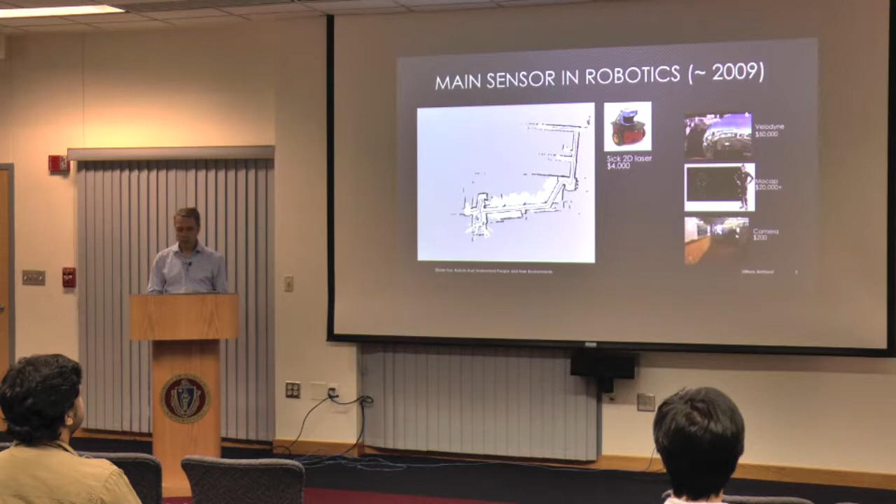So at that point in time is when the Microsoft Kinect system came out, what we call these RGBD depth cameras. The main purpose of this sensor in the Kinect system was actually to track people in gaming environments.

Here I'll show you briefly what the raw input data looks like from such a depth camera. At the time I was lucky enough to be directing an Intel research lab in Seattle, and as an Intel person, we were able to get our hands on early prototypes of that camera. So we were really excited when we were able to see this kind of data.

Especially for robotics, this was really exciting because for a robot, what you care about is how far things are away. On one hand, if you want to avoid crashing into something, it's good to know where the obstacles are. Or if you want to pick something up, it's very useful to know where that is in 3D space. That is why these cameras have had, since then, a tremendous impact on robotics.

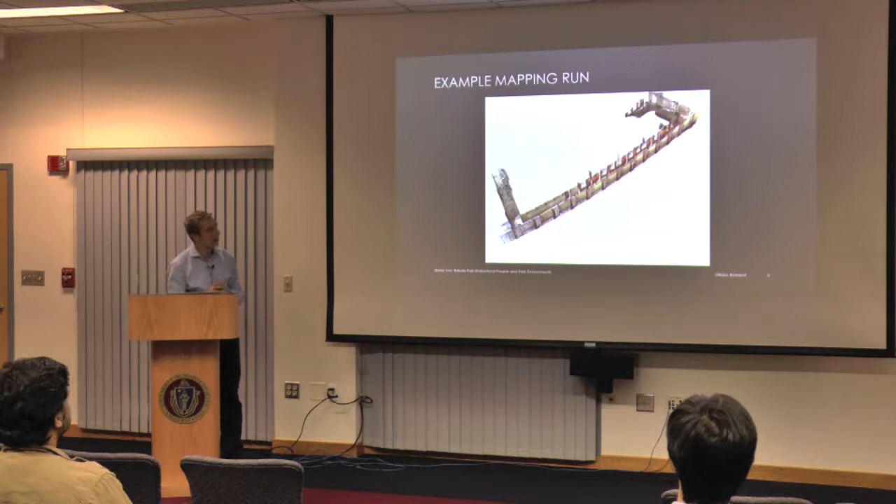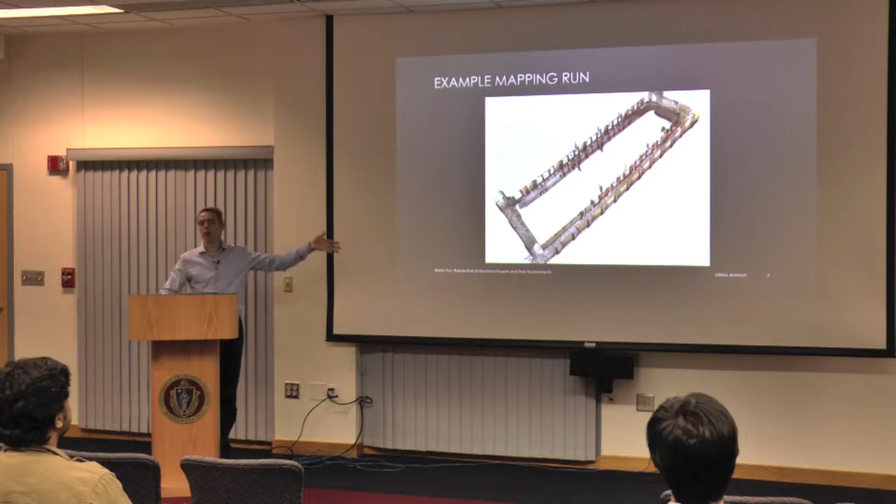This is now the step where we're doing visual odometry forwards, which means we're stitching all that data together. At some point you can detect a loop closure because it's visually the same, and then we can use this to snap things into place. Very similar to the 2D laser scanning I showed you, but now done in 3D.

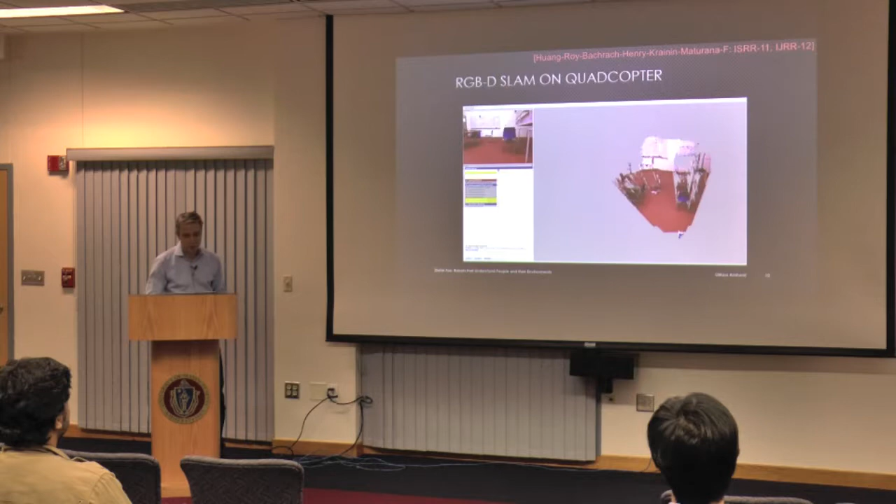Another project we did was working with Nick Roy at MIT, who does work with quadcopters. So we put it on a quadcopter, and now you can build full 3D maps on a quadcopter.

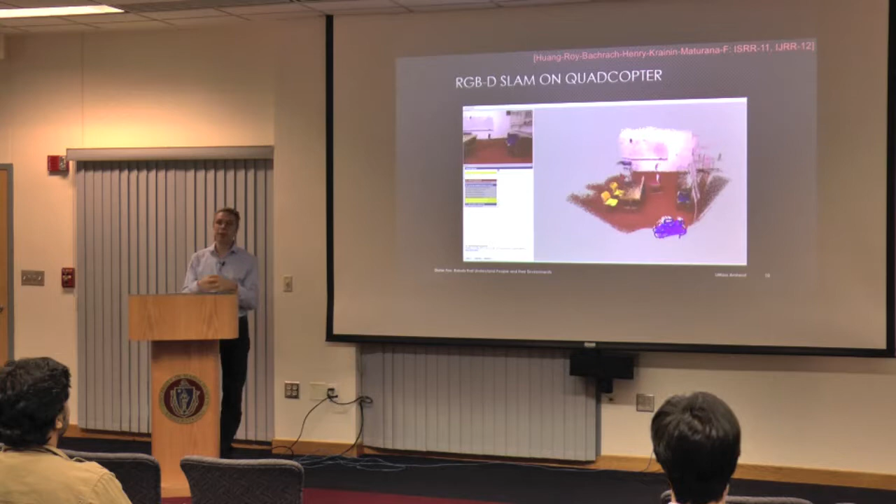There are nowadays many different techniques for building these kinds of 3D maps with depth cameras, so I'm not going to go into real depth here, just give you some examples of what we can do.

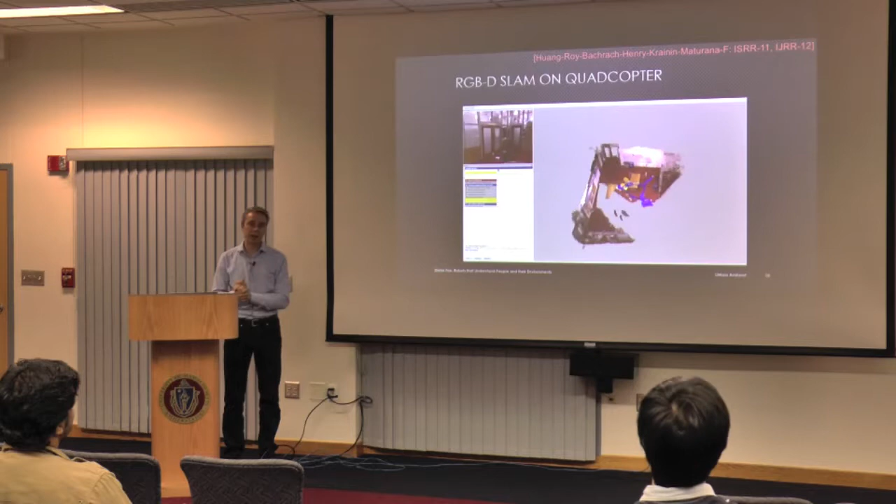The representation of the map is typically a 3D colored point cloud, where depth maps give you points in 3D space, and we use the color from the color camera at the same time. We also represent surface elements using so-called surfels, little disks in space that represent surfaces. Richard Newcombe, during an internship at Microsoft Research in Cambridge, developed a technique called KinectFusion.

I'm sure many students have seen and heard of KinectFusion, and it was really an eye-opener because they showed how you can build, in real time, very high accuracy maps of at least local areas. I'll show you a brief video soon.

The main idea is that you have a 3D volumetric representation of the space, and in each of these voxel grids—say a voxel is 1 by 1 by 1 centimeters, pretty fine-grained—you do not store whether it's occupied or not, which would be the natural thing people had done before, but you actually store something called a signed distance function.

What you store in the signed distance function is: if I'm getting a certain depth estimate along a pixel ray in the camera, then along that ray I'm storing how far in front of or behind my measurement each point is.

At the measurement I store a 0 distance, in front of it I store -1, -2, -3, -4, and behind it I store increasing positive values. I'm doing what's called a truncated signed distance function, meaning I only do this close to the surface.

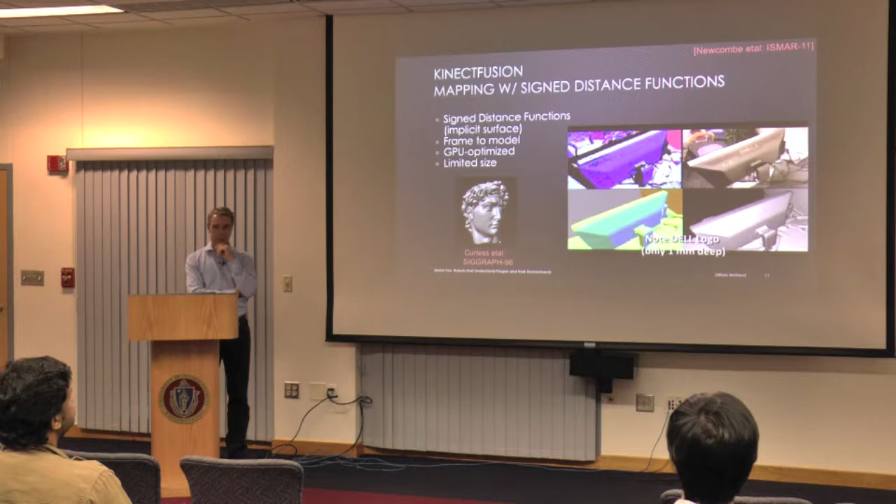The 3D voxel representation itself just stores the signed distance values, but it turns out you can very efficiently extract a mesh, a vertex mesh, from that, and render from it—you can see here on the right the 3D representation.

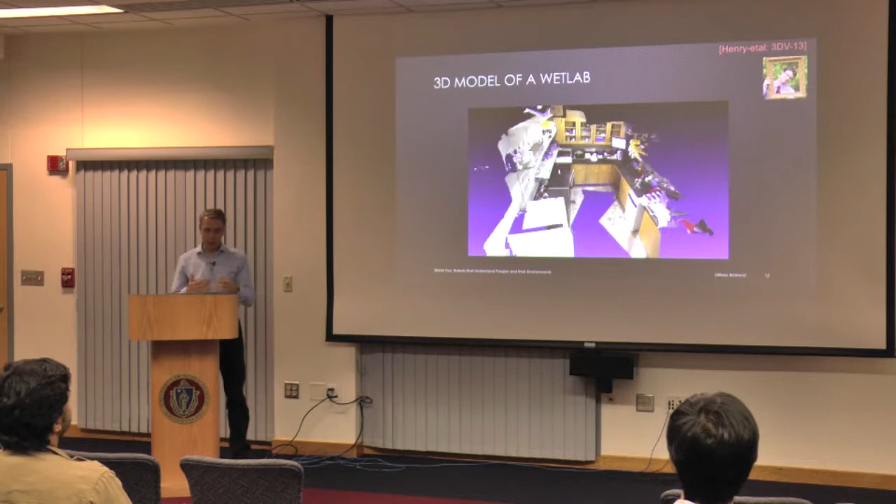Here's another map where my student Peter Henry added to KinectFusion some notions of using color for the matching, so it's jointly matching using color information and depth information, along with an ability to do loop closure in these kinds of models.

You can see that nowadays we can get pretty good 3D models of these environments, but you can also see clear limitations. For example, in the upper left there's a lot that's not modeled very well, because those are plastic bottles, and the plastic surface is not detected very well by the camera.

So there are still many limitations. Another limitation is, for example, if you want to model small objects like a keychain, it's not clear how we should even represent that. So there are still many open questions in this area, but I think we're at the level of getting pretty good 3D models nowadays. This one was built just by walking once through this bay in the wet lab.

One project we looked at was how to enable robots to autonomously build models of objects. So you could imagine the robot moves through the environment or through your house, and there's a new object. It should be able to pick up the object and build a 3D model of that.

Here you can see our first approach where the robot has the object in hand, and we're using the depth camera to track the arm of the robot and jointly build the model of the object. You can see here on the right how the object model is built as the robot moves it in front of the camera.

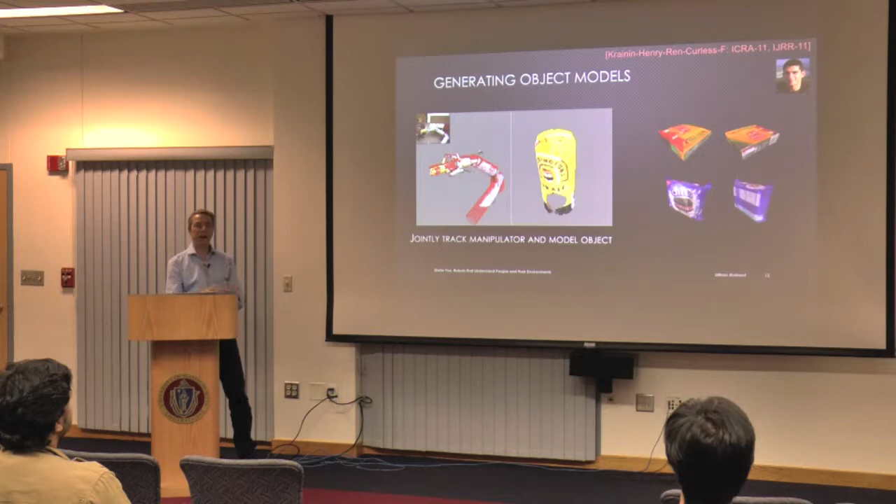The approach here is very similar to the environment modeling we've done, because whether you build an object model or a model of the environment, it raises the same kind of questions. So we also do things like loop closures on the object model now. This is a technique that enables a robot to build these 3D models, and on the right you see some examples of objects we can build.

One question now is how should the robot actually move the object in its hand in order to build a complete model? Because the motion itself depends on the shape of the object as well.

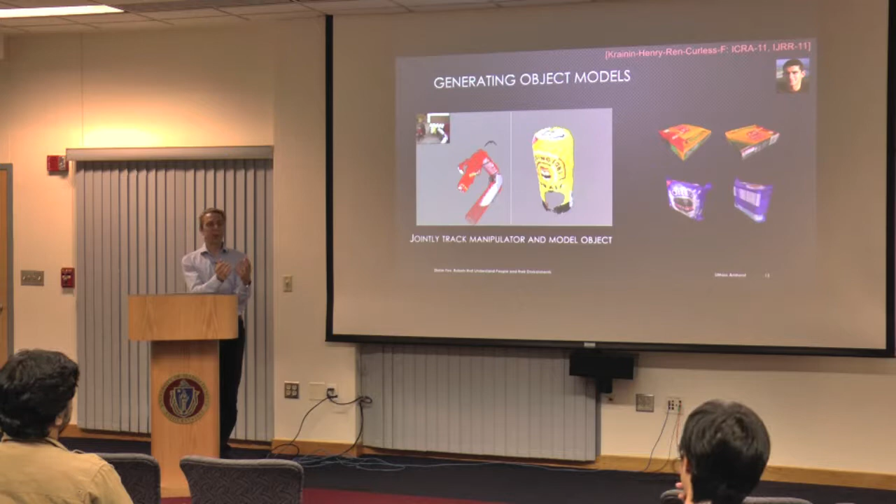In this context, we took advantage of the fact that with signed distance functions, we're not only modeling the surface of an object, but we can also get an estimate of how uncertain we are in the surface. You can see this on this slide where, as the object model is being generated, I'm showing in the coloring the uncertainty we have in each surface element. That uncertainty depends on how often I looked at a certain surface element and from which angle I looked at it.

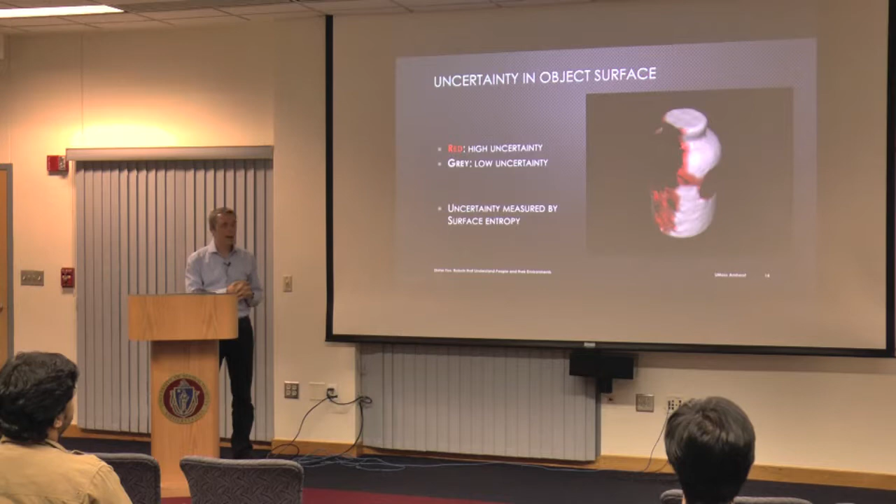Red means high uncertainty and silver gray means lower uncertainty. As surfaces come newly onto the model, there's of course higher uncertainty, but as we see more of those surfaces, the uncertainty decreases. The good thing is we can now use this representation for the robot to determine from where it should look at the object in order to decrease the uncertainty.

It's very simple: let's say you have this partial object model and a notion of the uncertainty you have. Then we simulate multiple viewpoints and choose a viewpoint such that if I look at the object from there, I'm going to maximally reduce my uncertainty, measured as entropy over the surface.

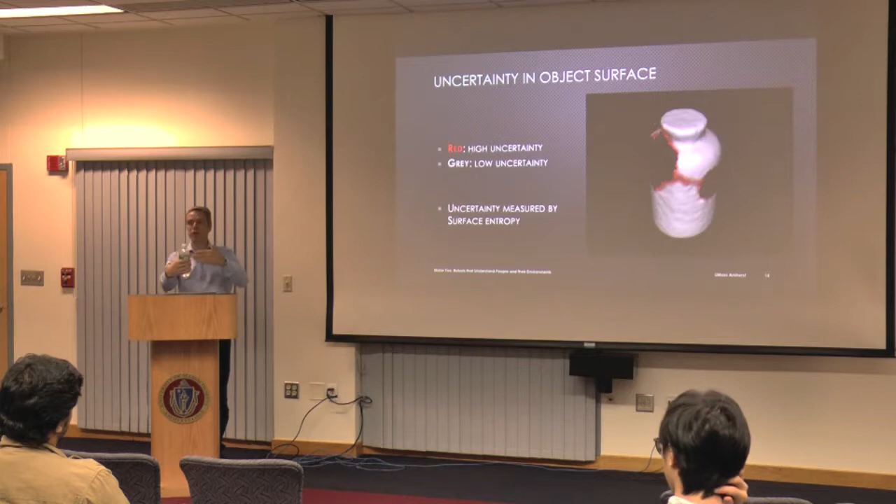Then what I'm going to do is, if I choose this viewpoint, I'm just going to rotate the object such that the viewpoint corresponds to the camera itself. And this is how it then works on the robot.

The robot picks up the object, and initially, to get an initial idea of the object, we do a pre-programmed trajectory here. And now it's already starting to build up this 3D model.

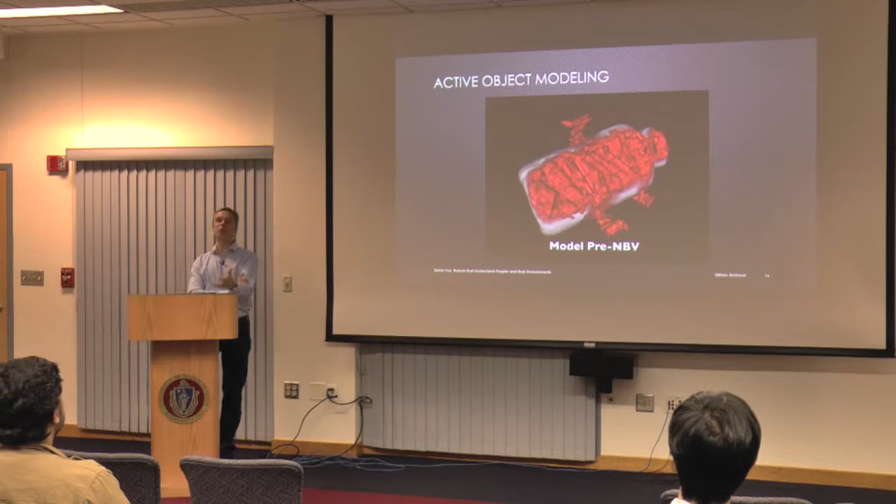At some point, it takes the model it has so far, along with the uncertainty, and determines how to look at the object so that it reduces the uncertainty as much as it can. In this case, it's actually rotating it so it can look underneath. You can see that now it's starting to reduce uncertainty here.

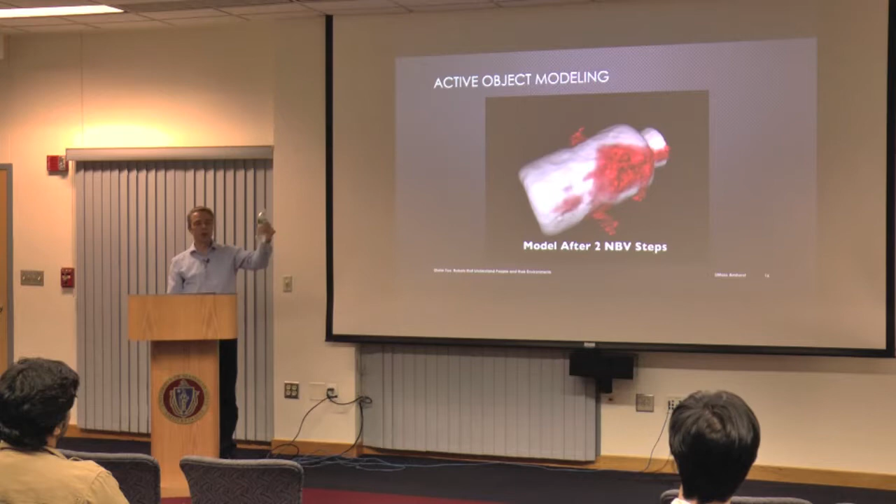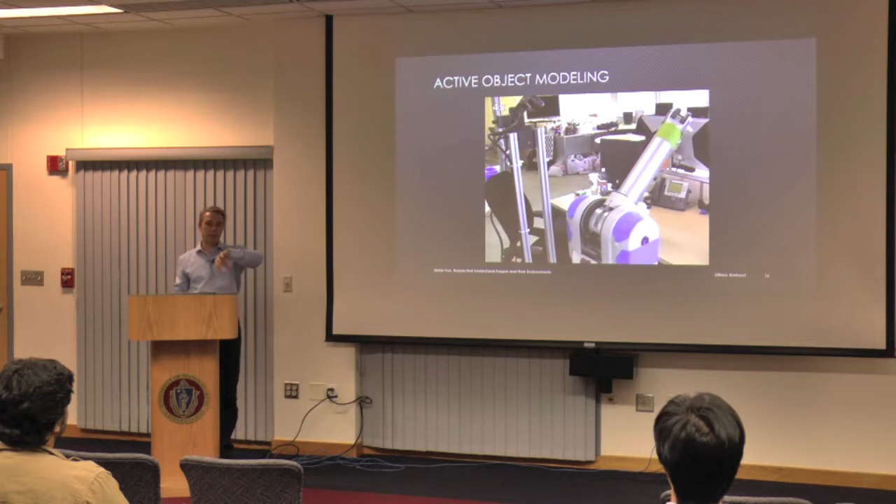I don't have it in this video, but the robot also considers its own hand, which means it can reason about occlusion. For example, if I hold this object here, I will never perfectly see the surface underneath my hand. So the robot can then put the object down and compute a new grasp that mostly exposes these uncertain surfaces. After two or three of these regrasps, it has a complete model of the object.

So now we are able to build objects of 3D environments, and with this kind of technique, a robot might even be able to autonomously build 3D object models. One more thing that's tricky to model is people.

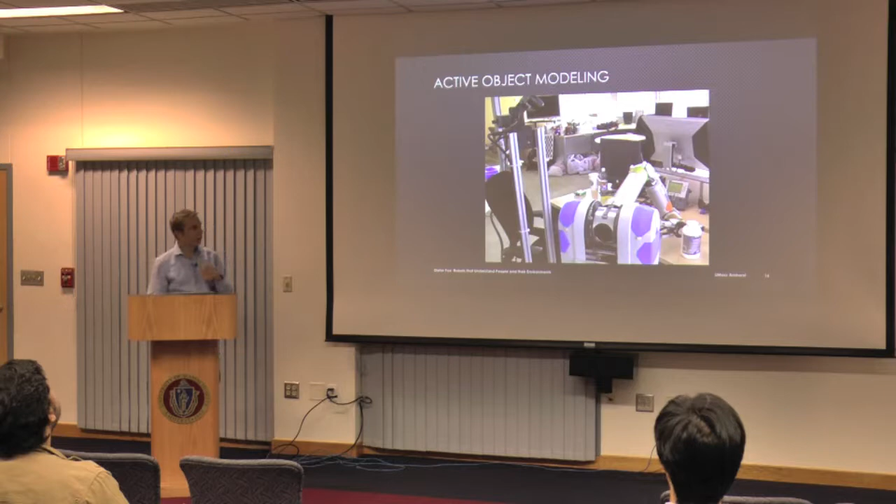So the problem is that the modeling approach assumes that nothing is moving in the scene, or that the only thing moving in the scene is the camera. If the head is moving, then the model is just averaging over the surfaces it's seeing. So that brings up the question: how can we build a 3D model of that person as the person is moving?

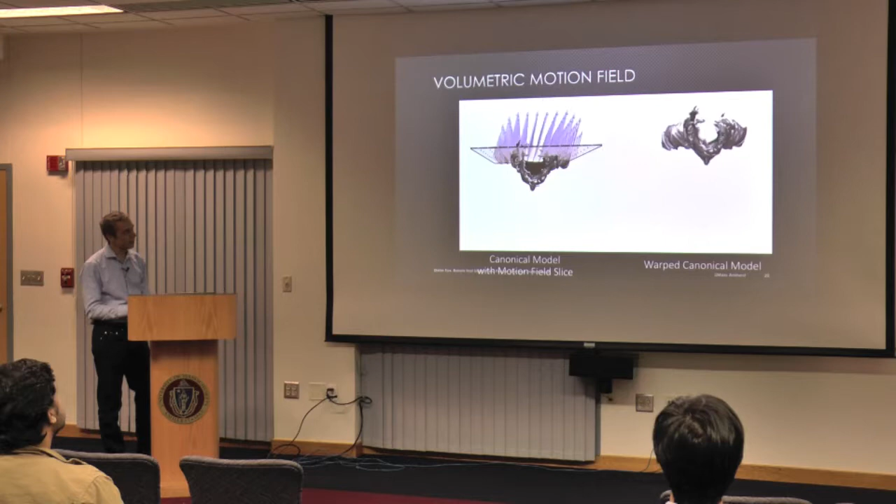So we can handle pretty rich motion and pretty fine-grained motion as well. Again, the trick is that we estimate the motion field along with the reconstruction.

So this is what I want to say about the 3D modeling aspects of environments, objects, and people. Any questions about that?

If you do this at slower frame rates, it's harder. That's a cool thing - Andy Davison's lab had this insight. We used to say, okay, let's assume I have an algorithm that works at 10 frames, and then you'd say, but now if I have a camera with 30 frames, it's never going to work. But the idea is that if you have a higher frame rate, the optimization problem between frames gets easier because the motion is smaller. So higher frame rate does not necessarily mean it gets harder - it actually makes the estimation problem easier.

And computation - the computation itself can also get faster because the steps you need in your optimizer is less, right?

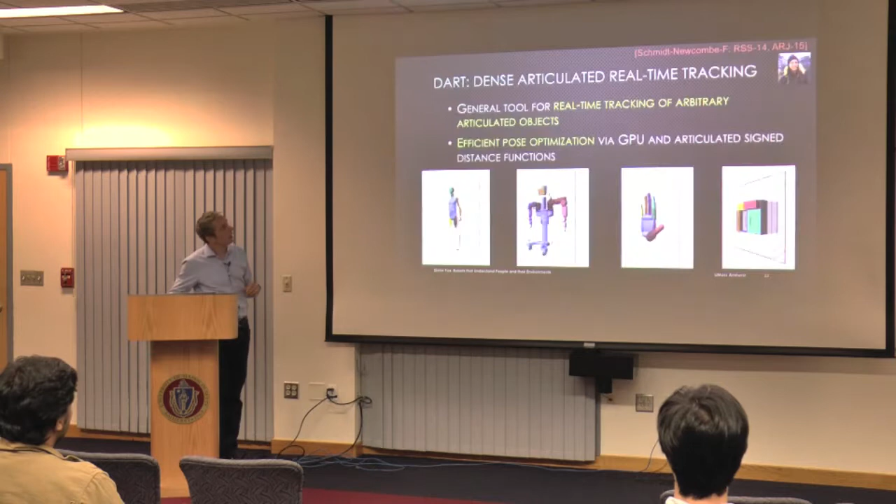The approach was called dense articulated real-time tracking, this work that Tanner did together with Richard. So the idea is that we don't want to only track rigid objects like this bottle, but we also want to track things that move themselves. So for example, you can represent a person as one of these articulated objects where we have rigid parts and they move against each other through joints, transforms on these joints.

You can have a robot like the Baxter robot here that can be represented that way, or a human hand. On the right side, even furniture can be represented as articulated objects or as an articulated scene where you have a door that has a certain joint and you can open it through this. So the goal now is how can we track these objects through time, given that we have an initial pose estimate.

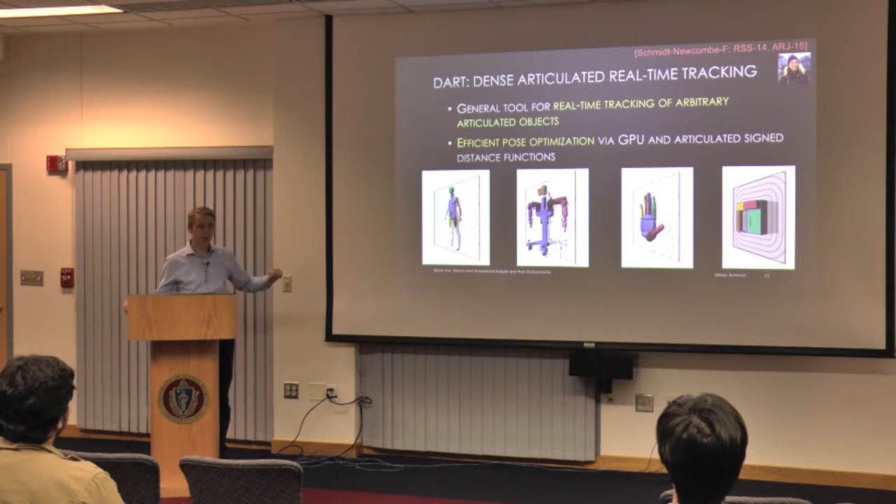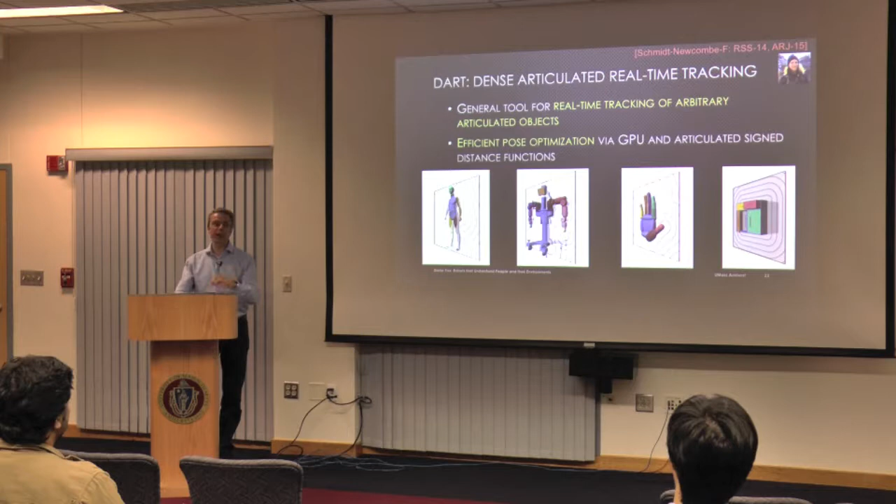And the key trick is we're representing the individual parts of the objects through these signed distance functions, which is exactly what KinectFusion did as well. And with these signed distance functions, we can very efficiently match the objects against the data. I'll show you a bit more on how that works.

Wait, maybe I should stop that briefly. The nice thing is, if I have this 3D representation of the manipulator, I can very efficiently compute or look up distances from the surface of that manipulator, which is what the signed distance functions give us readily. So I can quickly look up any point in space and say this point is that far away from the object. And I can also quickly compute the direction in which I should move that point to get it closer to the surface. And these are the isocontours of this distance function of a slice.

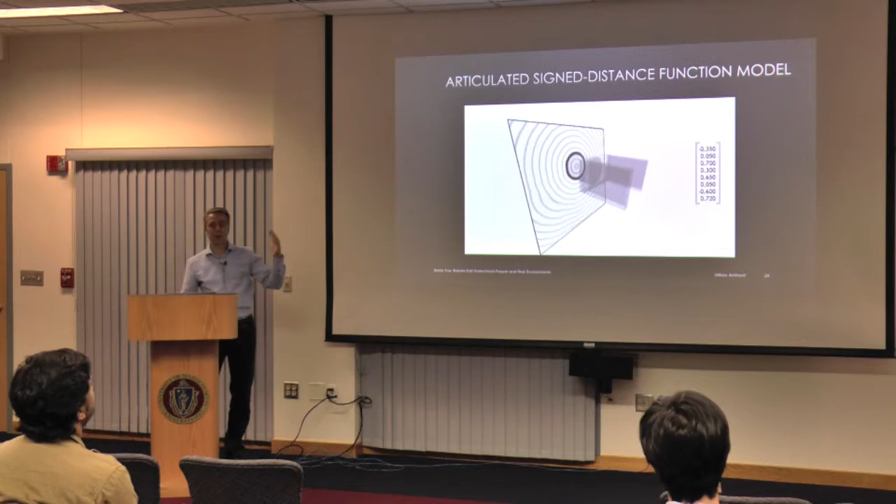And I can also, of course, compute these depending on the articulation of the manipulator. And we can now use these signed distance functions to very quickly match our model against depth data that we are observing. Let me just give you one example.

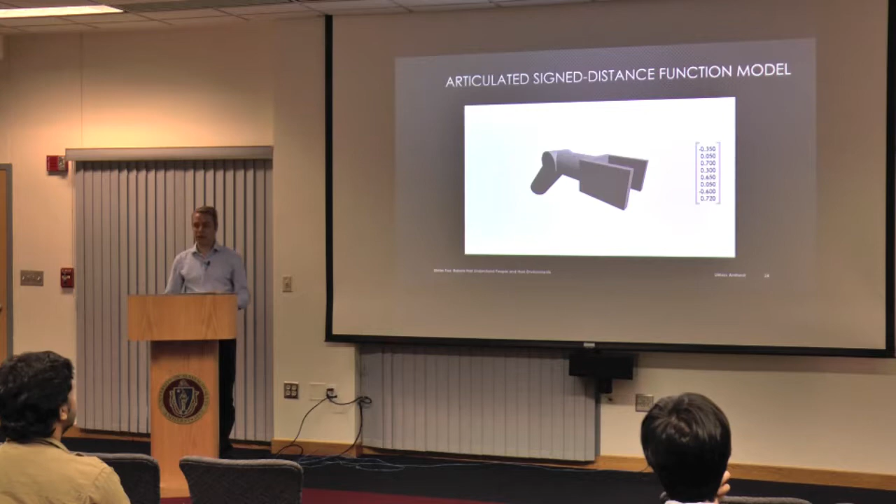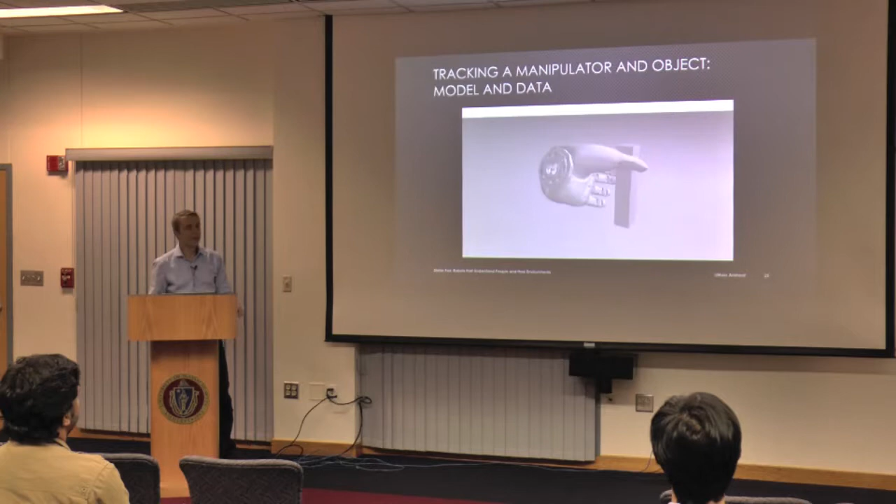This is simulated right now, where let's assume we have a robot - this is a robot hand, and the robot hand holds this object it's holding, and we are observing this object with a depth camera, which you will see as these black points coming up. Here's the depth camera view. Now let's assume that the model doesn't really fully match the data - the black is the observed depth data, and the gray is the model.

So what we would like to do in tracking is match our model into the data, and if we do this at every time step, then we track the object. Is that clear? So now what we can do is, because the robot hand and the object are represented with these signed distance functions, we can very quickly compute for every point that we observe.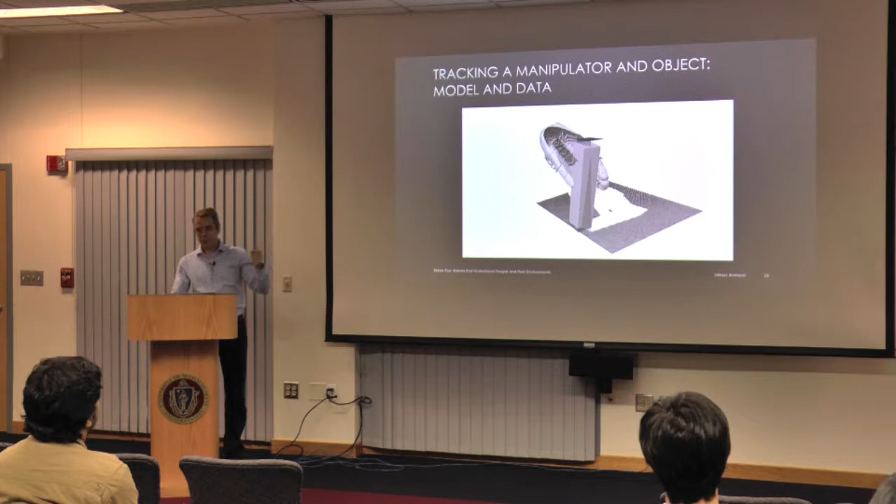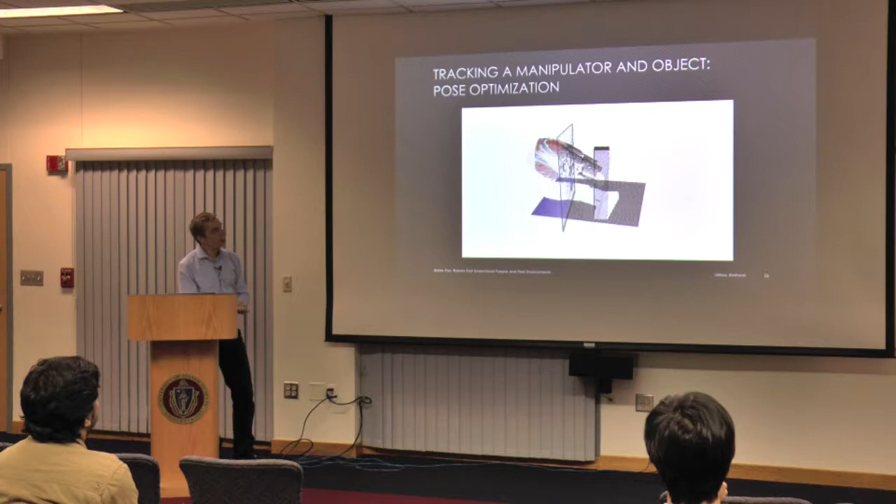These black points - we can compute how far each is away from the hand model. And you can see here, I'm coloring those object points by the distance. This is just a slice through this, where red means far away and blue means close. And now we just do optimization, stepwise optimization, Newton steps, in order to match that object against the data.

Now, and again, we can do this very efficiently. So after this step, we just match the object into the data.

But imagine on a robot, you could have some additional information like touch sensors. So in this case, imagine these two fingers, the robot detected that these two fingers are touching the object. But because of occlusions, it might not see the finger itself. So what you might get is an estimate like this, where the second finger is not touching the object.

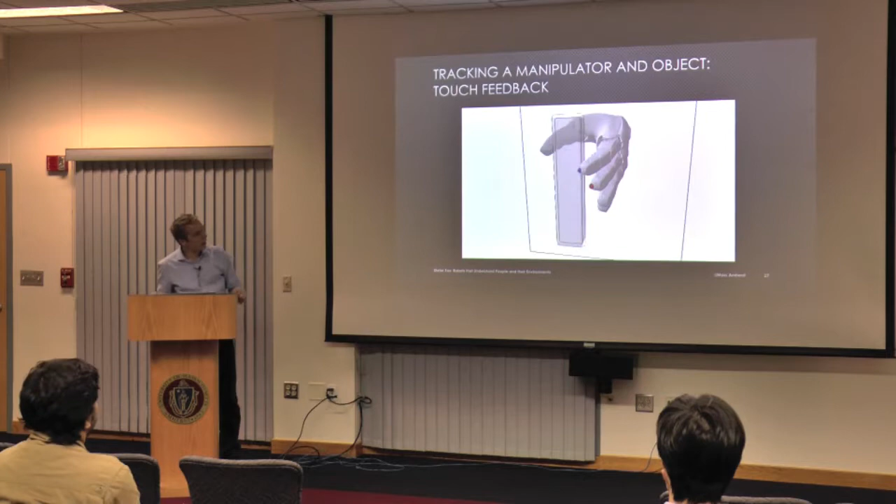But because we're doing this model-based optimization, we can also take this into account and make sure that our optimized position obeys that constraint, so the finger is actually on the surface of the object. Another constraint here that we are violating in this case, these two fingers are kind of sticking into each other, as you can see.

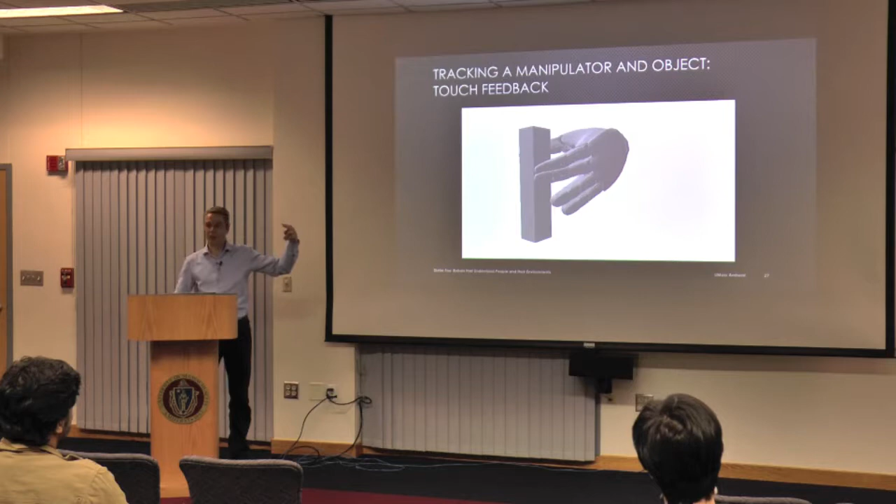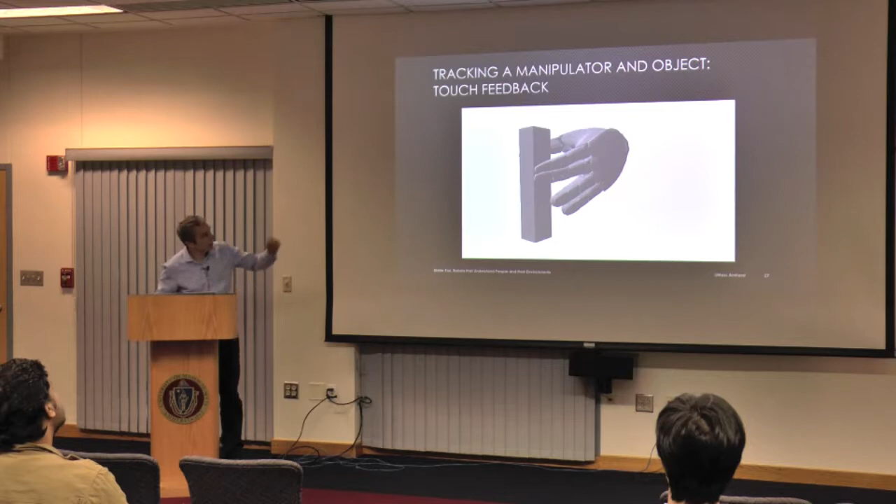And typically, we assume that objects don't just interpenetrate. So we can model that using the signed distance function as a constraint, and take that into account in our optimization, and make sure that the fingers don't interpenetrate. So we can push them apart.

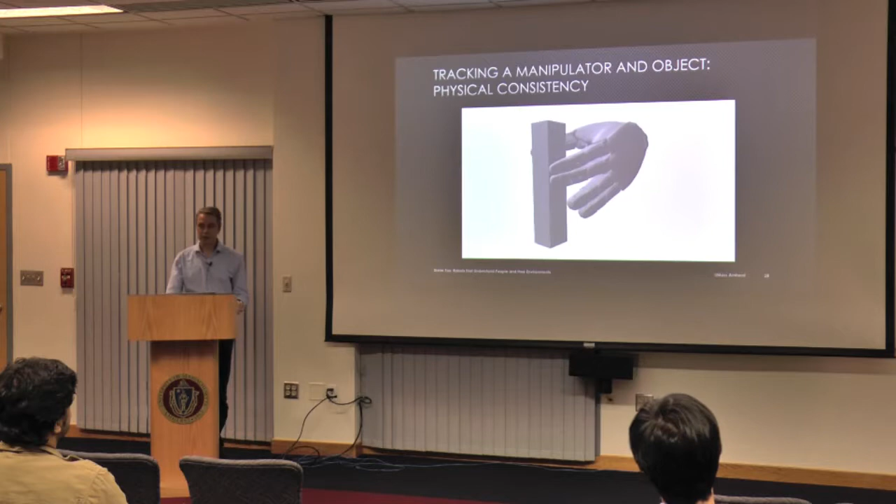The important part is we're not doing this one after the other, but you can phrase this as one joint optimization over all of these.

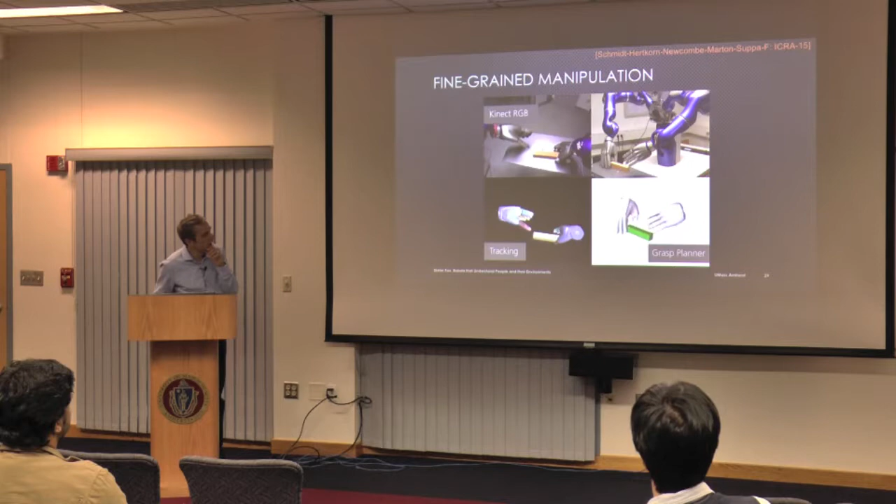Here's an example where we did this in collaboration with the German Aerospace Center near Munich on a robot, where on the upper left you can see the viewpoint of the robot. Here the robot is tracking its own hand and the objects as it's manipulating it.

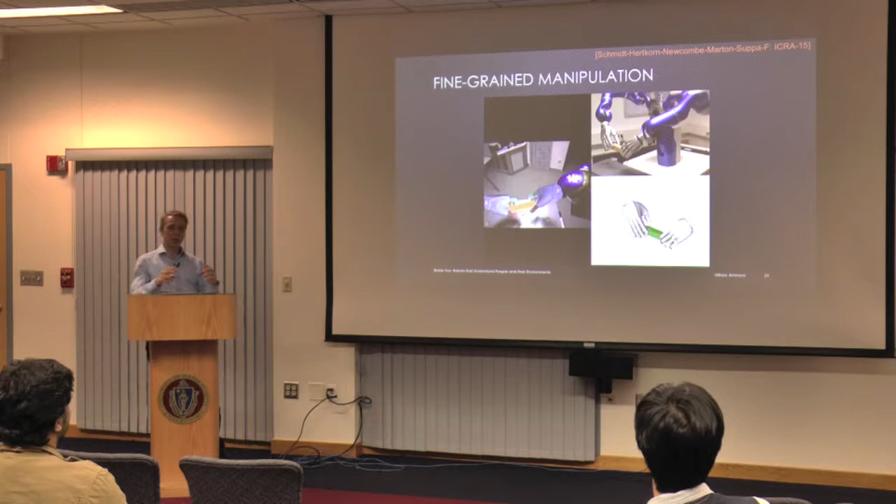So we can do pretty nice fine-grained control of the manipulator now, so it can pick up the object, it can hand it over. And again, all of this is done with feedback control using the visual feedback.

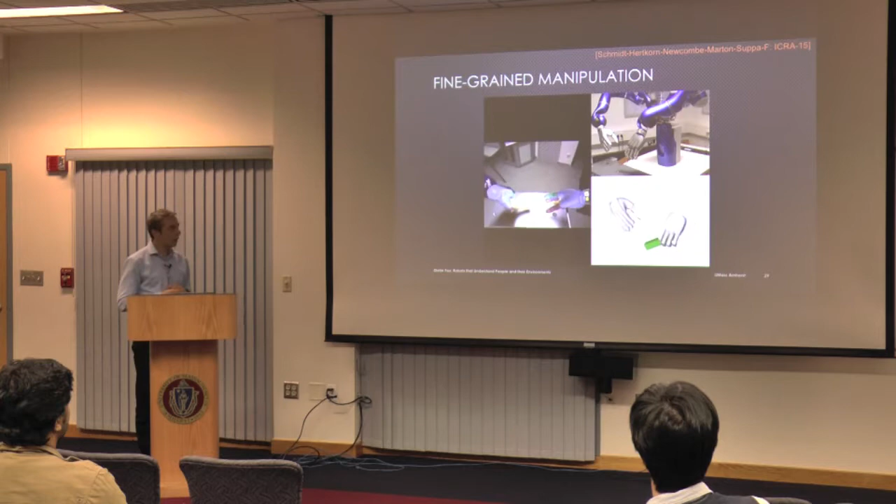And in this case, the good thing is if the robot, for example, drops the object, because we're doing this in real time, we can track the objects as it's falling down.

So the idea of this is really that we now can have robot manipulators that can pick up objects robustly, by using, in a sense, the real-time visual feedback to do this.

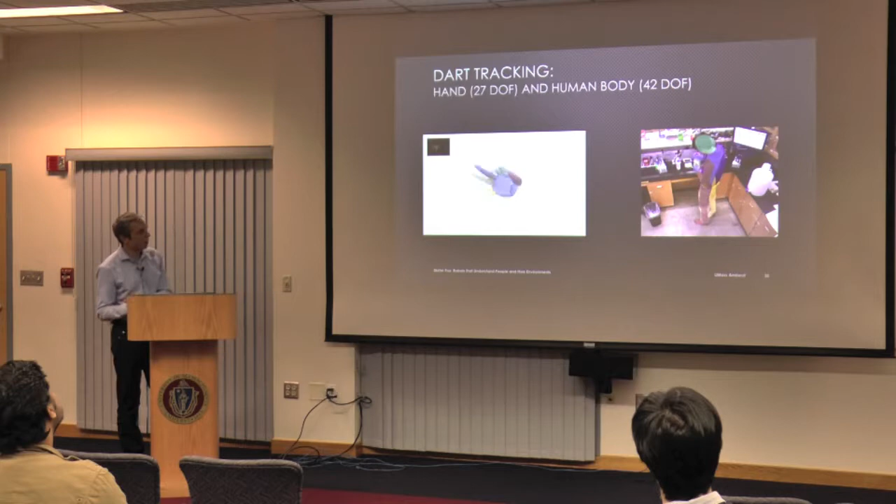Here's another example. With this kind of framework, we can also track human hands and human bodies. Again, this is tracking only, so we cannot initialize that position.

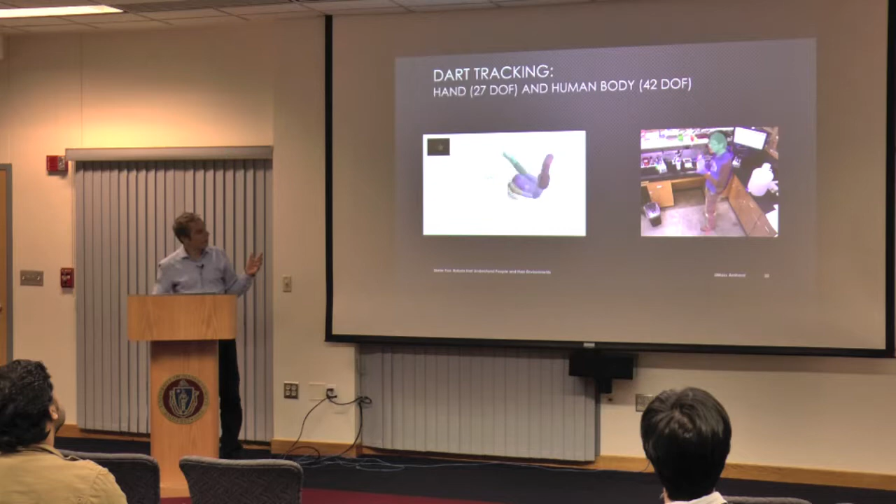One other area that we're looking at right now is actually also motivated by some work that Charlie Kemp does at Georgia Tech. He's looking a lot at how robots can help people with physical impairments. He did some work with Henry Evans, who cannot move his body below the neck.

The question was, what are the kind of tasks that robots should be able to do to help these people, and they, for example, showed that the robot can help him shave himself, or even tasks like pulling up the blanket.

And if you want to do these kind of tasks, it's not enough to track a person through rigid bodies, but you need to actually track the full surface model of the person. So you need a much finer grained tracking system than the one I showed you.

So far I've been talking about this tracking work, and one of the main advantages was that we have nice 3D shape models of things. The problem with these model-based approaches is that from an optimization perspective they just work in a local basin of attraction, which means, for example, if you want to track the hands, the tracker needs to be initialized with the hand position 1/30th of a second in the past, so the motion between frames is very small. The question now is, if the person comes into the frame, how do you initialize these models?

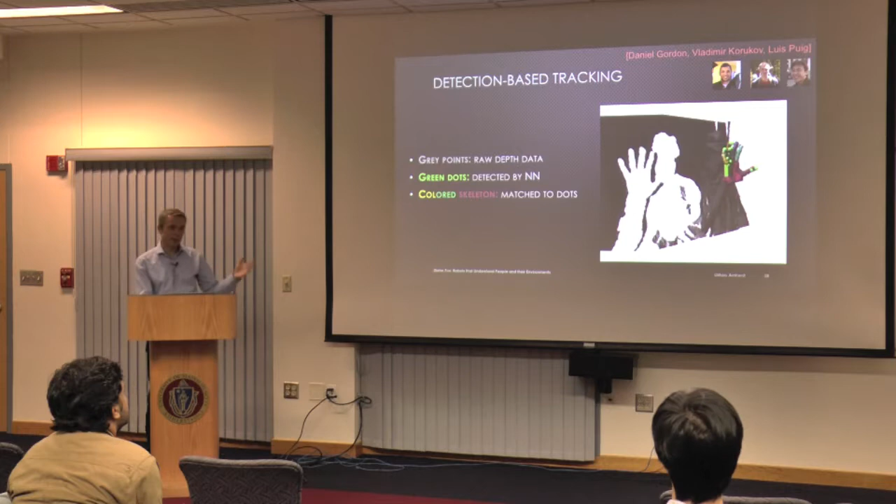We're currently looking at more elegant ways of combining model-based matching with deep learning. I think this kind of initialization is something you could not have done easily without machine learning. I'm not going to claim nothing but deep learning could do this, but deep learning did it pretty well.

Here's another example now.

The previous work depended on having a big data set of the hand moving, and you must have every point labeled by some approach. So here in this work, we wanted to see if we can learn to detect points on a model in a fully self-supervised way, just using a technique like KinectFusion or dynamic fusion. The approach here is as follows.

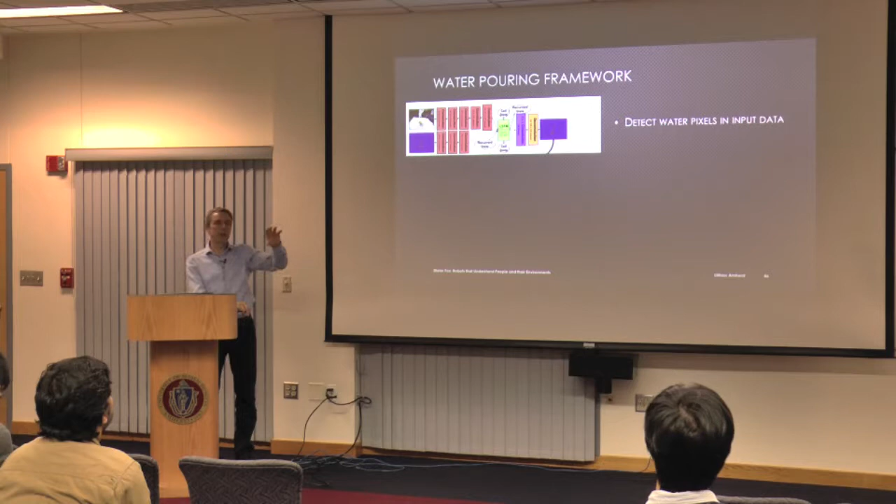So again, the first network just takes the video stream as input and detects the pixels of water. The next network then takes the output of that, which is this heat map labeling on the right.

And from that, it tries to regress to how much water is in the cup. Which is not quite as trivial, because you have to look at that area, and from that area you infer how much water is already in the cup or bowl.

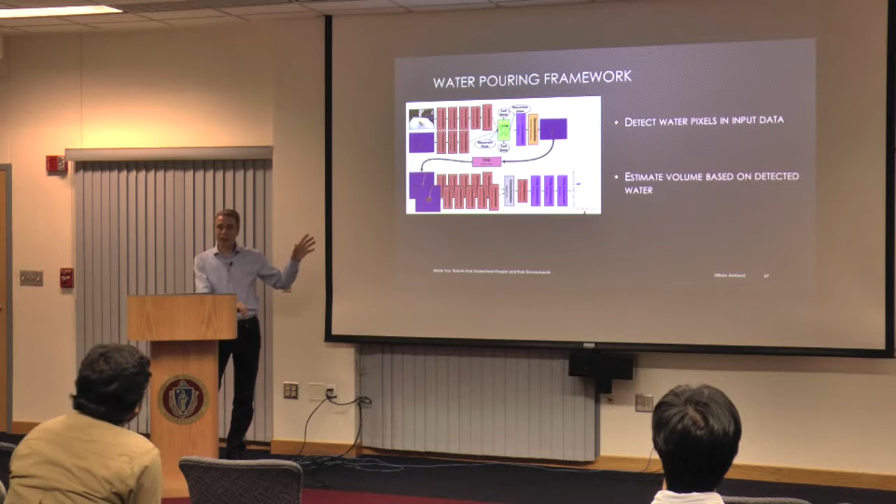Caveat: a lot of this is clearly overfitting to the data on which we trained the robot. We had one table that you'll see in the videos, and we trained it on 3 different coffee mugs, which you'll see in one of the images. But ultimately, the goal is to go from the raw input to an estimate of how much water I've already poured.

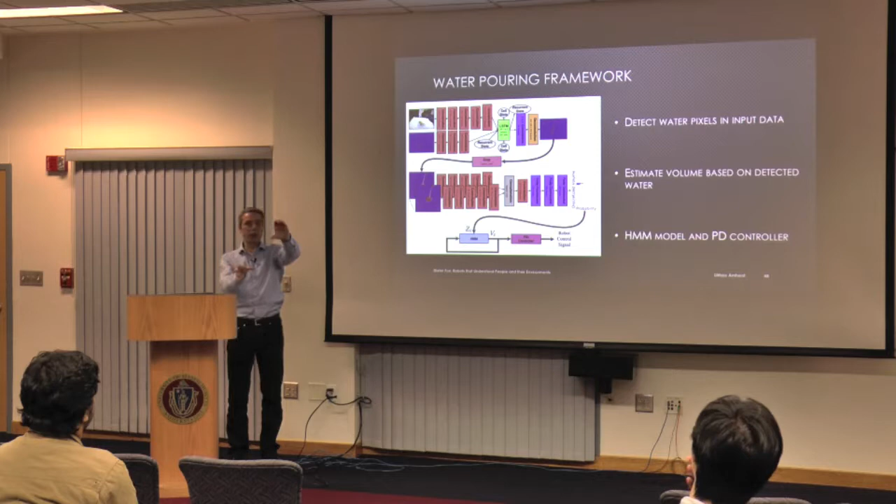Once we have an estimate for that, we can put this very simply into a controller that just rotates the hand. If I don't have enough water in the cup, I'll rotate it further this way, and when I'm close to the target amount, I'll rotate it back. It's a very simple controller that's mostly based on the reasonably good perception we hope to get.

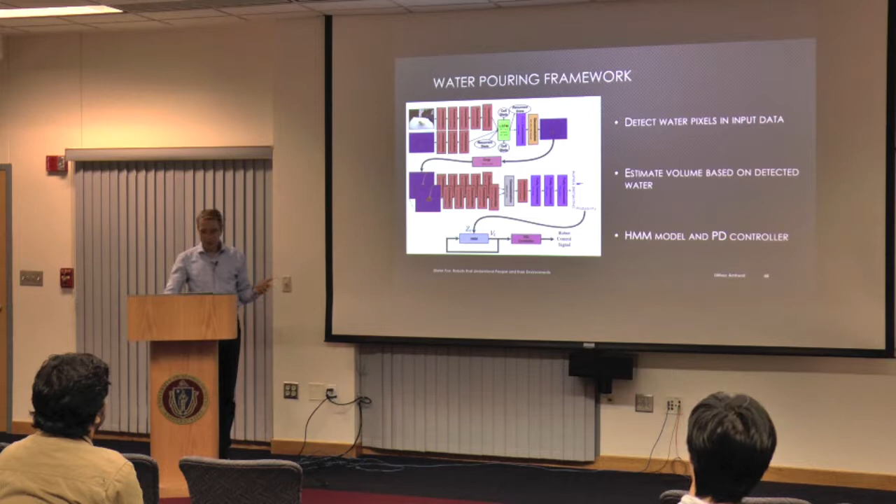Now the more interesting task is, of course, real data. I must admit this did not just work on real data, because the water simulation comes out a bit clumpy, so there would have to be more fine-tuning to transfer that to real data. But we wanted our robot to detect real data.

So we came up with a specific trick: we attached to the depth and color camera of the robot, a thermal camera. The cool thing is, if you heat up the water, it's very easy to detect in the thermal camera.

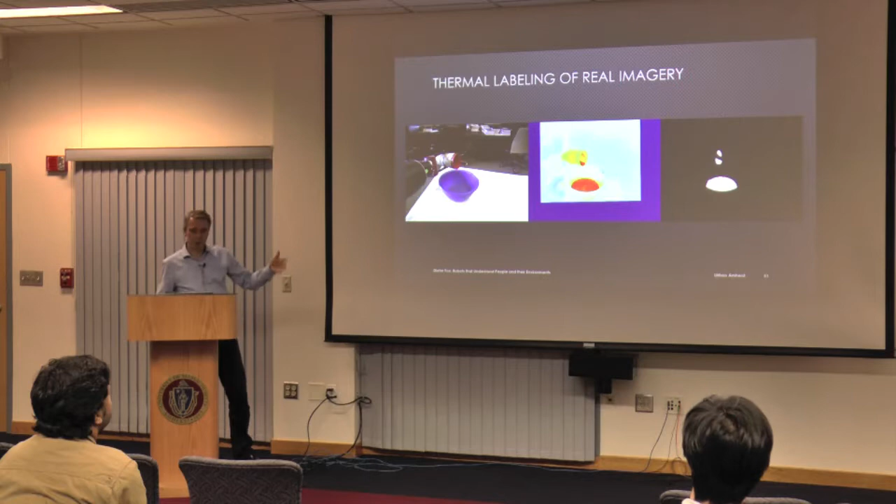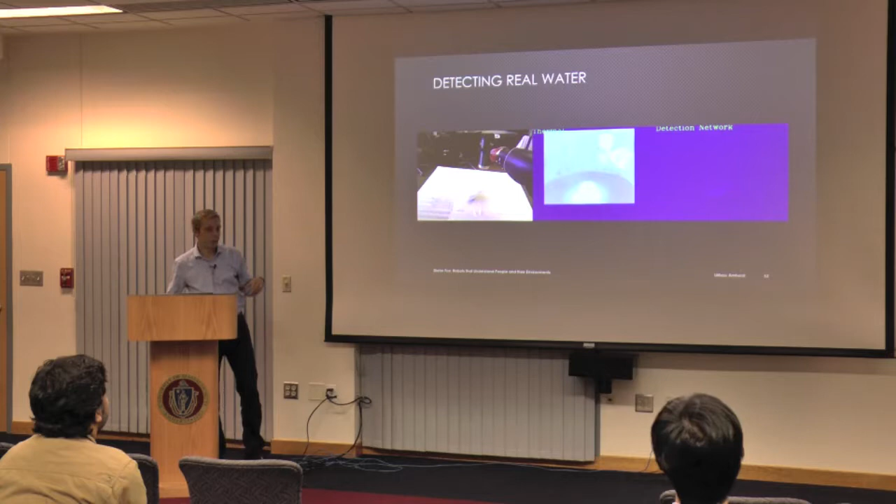Now we can train another neural network to do this detection. Here you can see an example output: in the middle, color in the middle, you have the thermal camera, and on the right you have the output of the neural network operating on the color data, not the thermal data. It's not perfect, but it's giving us pretty good detections of the water.

You can also see in the video, it's not trivial to detect the water, because there's all the... with the white tablecloth, or a towel in this case. So it's not a really simple task.

So now with this network we can detect the water pixels, and then we train another network that goes from this detection to telling us how much water is already in the cup.

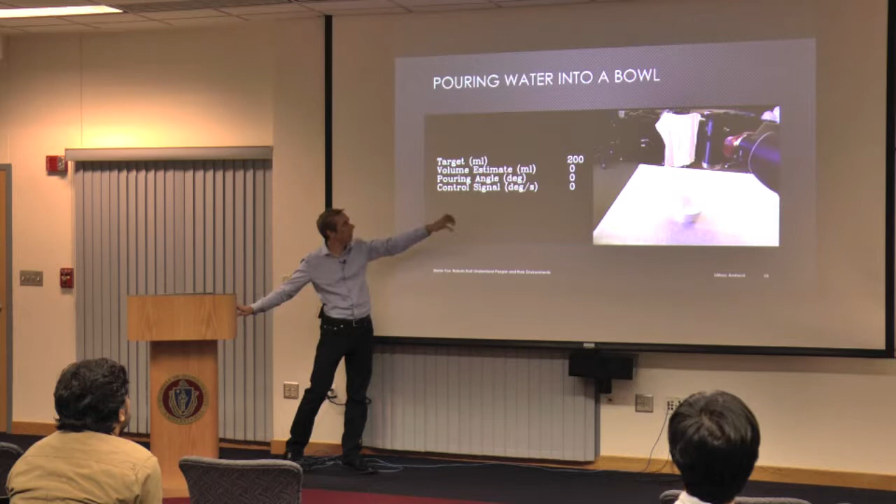Here's just two quick examples of how this now works. What you'll see on the right is the robot pouring water. Here the robot is tasked to pour 200 milliliters of water into that bowl down there. What you see in real time is the estimate of the neural network of how much volume there is, and this is the angle of rotation, which tells it which direction to rotate.

So here we said, okay, pour 200 milliliters. It keeps turning, turning, turning, and then the volume estimate goes up, and at some point it says enough, and then it's rotating back. In this case, using a scale, we actually estimated the exact amount. It was 222. Here's another example.

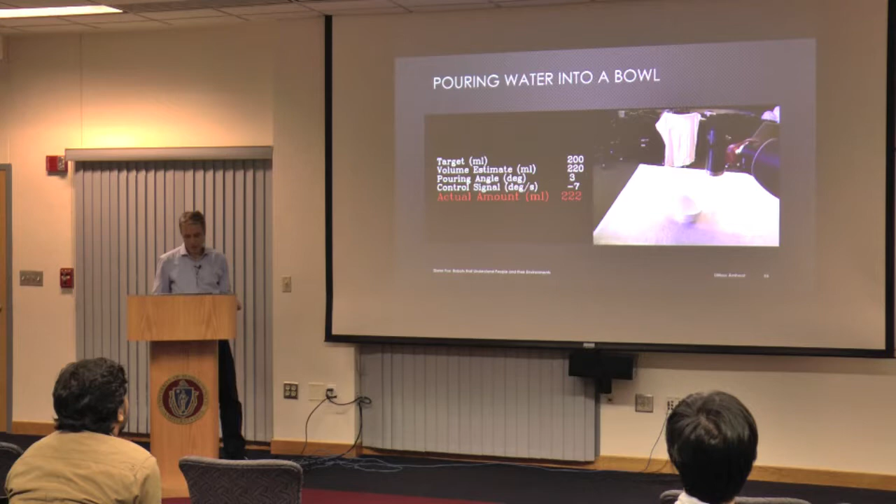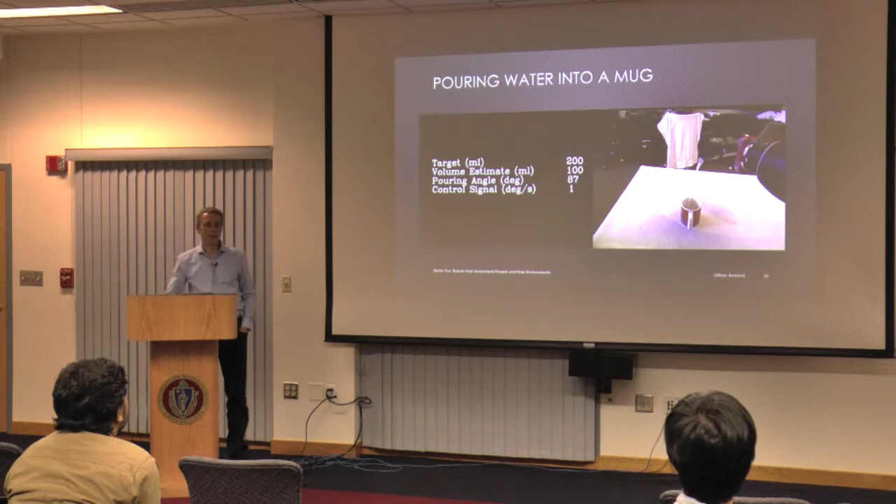Interestingly, the neural network was not told which object it's pouring into. But we only had three, so it's not a major problem here. Let me show this. Again, the controller is very simple, right? The key trick is really to have the network that goes from the raw color data to these volume estimates.

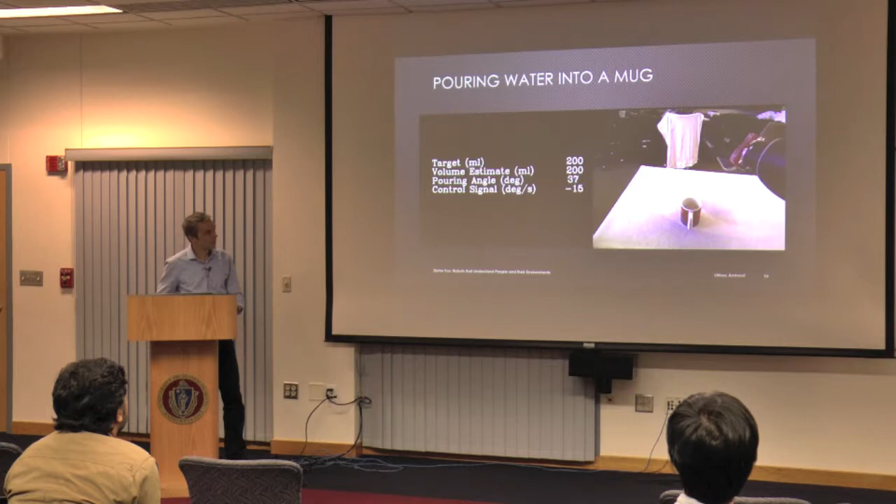The different colors indicate which target object we poured into. Interestingly also, we changed the amount in the cup from which the robot poured, so that the robot couldn't just learn to rotate for 5 seconds and then back to get 200. It really had to use closed loop control to do this.

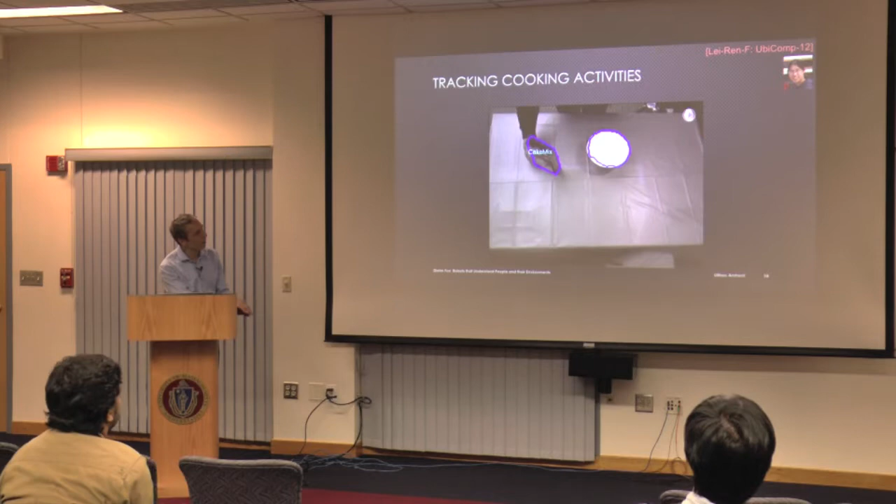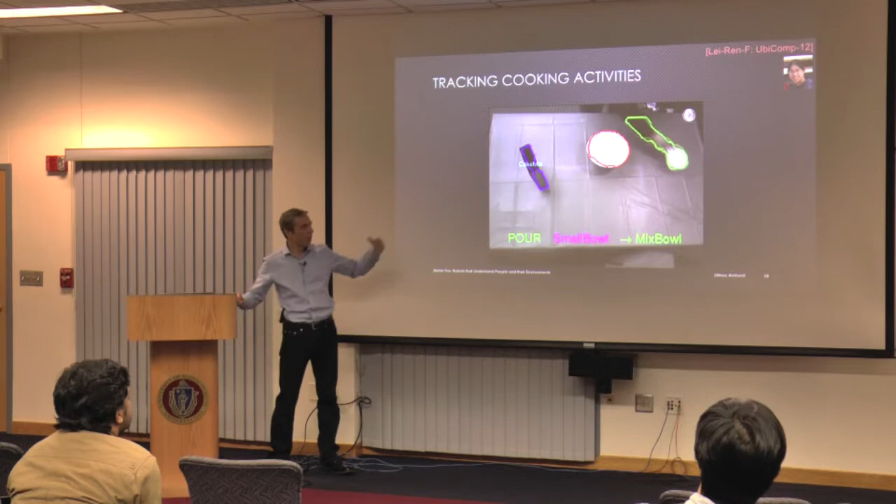Just one very brief example, now going to understanding activities in people. Here's some early work we did on activity tracking in cooking, where all we did was, given a recipe, you can see what the system is inferring about what's going on. All we do is detect these different objects, see which object the person is interacting with, and from that, using more or less just a hidden Markov model, we can infer what the person is doing.

But I think in this direction, there's still a lot of work that has to be done. I think this is something that we really need if we want to have these robots interact with people in a more natural way.

Okay, with that, I'm going to come to the discussion. Just in general, I think there were three main advances that enabled a lot of this progress. On one hand, new sensing capabilities like depth cameras, and there will be new generations of these kinds of cameras coming out. On the computing side, GPUs clearly had a huge impact, for training neural networks, but also for all this tracking work that I showed you. And also algorithmic advances, understanding how we can take advantage of all this new hardware and computing devices.

And I think we now have robots that are really able to detect, track, and manipulate objects far better than it was just like 5-6 years ago. So there's been a lot of progress, not only in my group, but really in the robotics community at large.

And I think building on these and moving forward, we'll have robots that are able to collaborate and interact with people in a much more natural way. There are many application domains for this kind of work. As I showed you, one example would be healthcare, elder care, robots helping elderly people, or small-scale manufacturing, science experimentation like doing experiments in wet lab domains, disaster response, and general services in the home. So there's going to be many application domains for that.